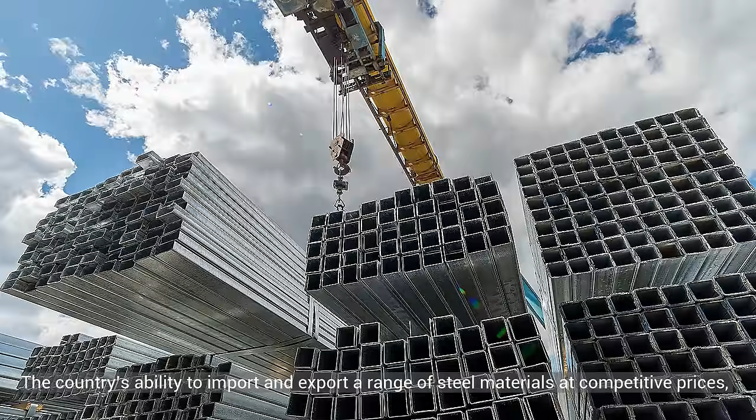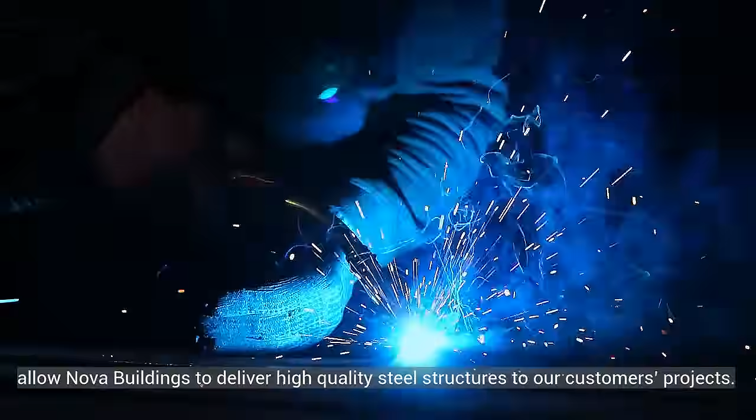Nova Buildings Regional Manufacturing Hub and Export Center for supply of pre-engineered buildings across Southeast Asia is located in Vietnam. The country's ability to import and export a range of steel materials at competitive prices, and the availability of skilled resources, allow Nova Buildings to deliver high-quality steel structures to our customers' projects.

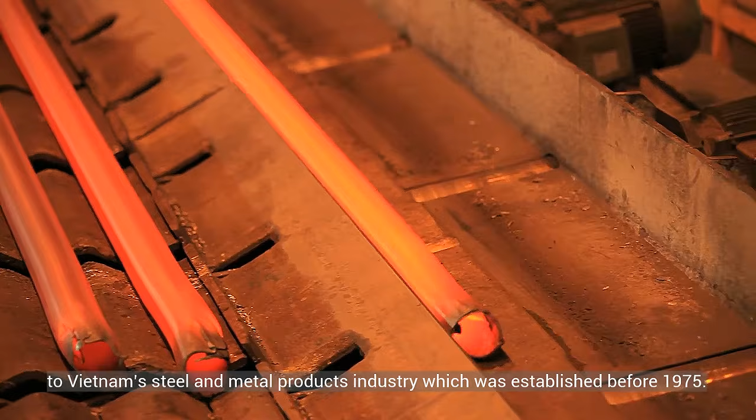Bien Hoa City on the left bank of the Dong Nai River is home to Vietnam's steel and metal products industry, which was established before 1975. Bien Hoa, the largest city in Dong Nai province about 30 kilometers east of Ho Chi Minh City, is in close proximity to the Dong Nai port in southeastern Vietnam.

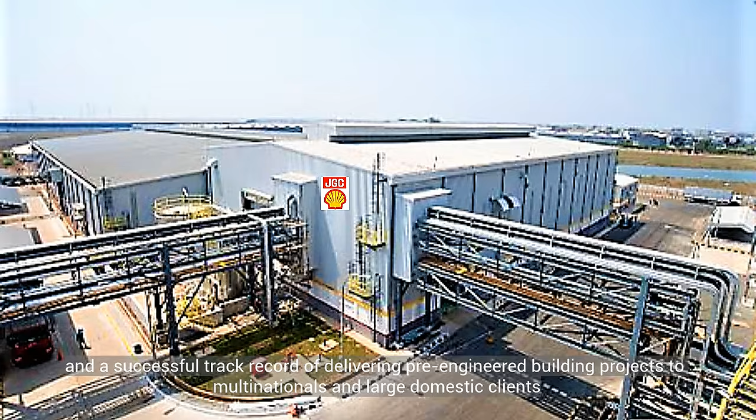This steel structure factory acquired by Nova Buildings has more than 10 years of operational history, and a successful track record of delivering pre-engineered building projects to multinationals and large domestic clients, in industries such as logistics and distribution, retail hypermarkets, agriculture, food and beverage, and aviation.

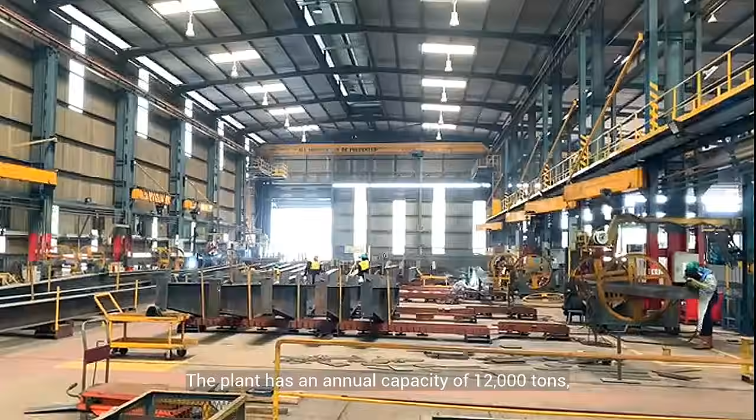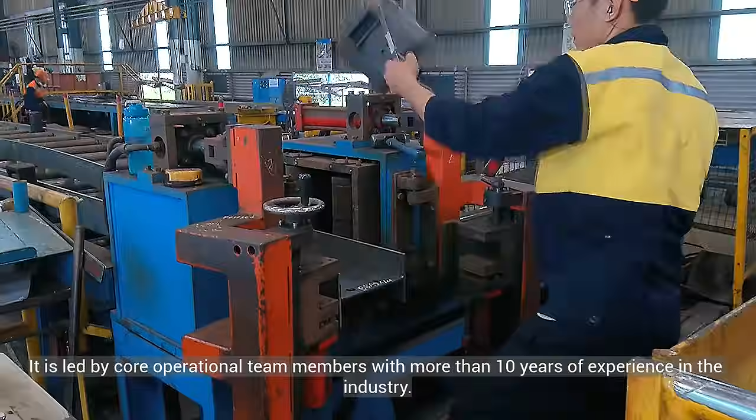The plant has an annual capacity of 12,000 tons, and a plan to ramp up production quickly with projected increases in demand based on Nova Buildings' sales pipeline. It is led by core operational team members with more than 10 years of experience in the industry. The production process is substantially automated, and supported by a factory layout that enhances the efficiency of production workflow.

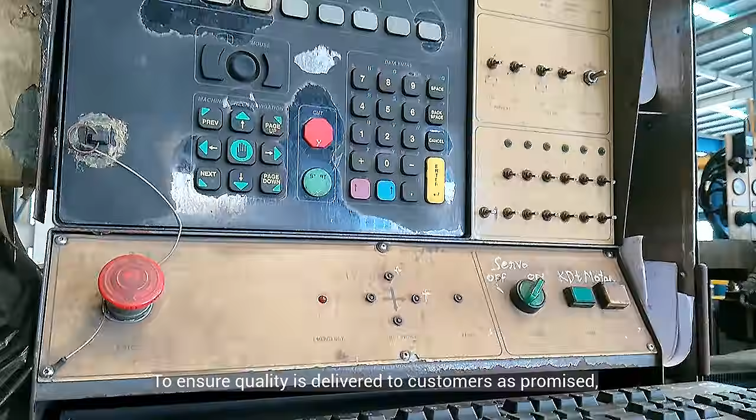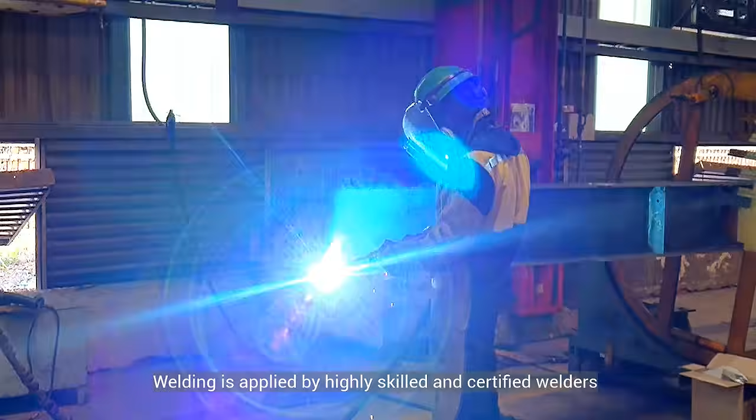To ensure quality is delivered to customers as promised, Nova Buildings facility is equipped with fine precision equipment that can achieve low tolerance values. Welding is applied by highly skilled and certified welders, in accordance with the Structural Welding Code of the American Welding Society. All production follows strictly to shop drawings approved by customers.

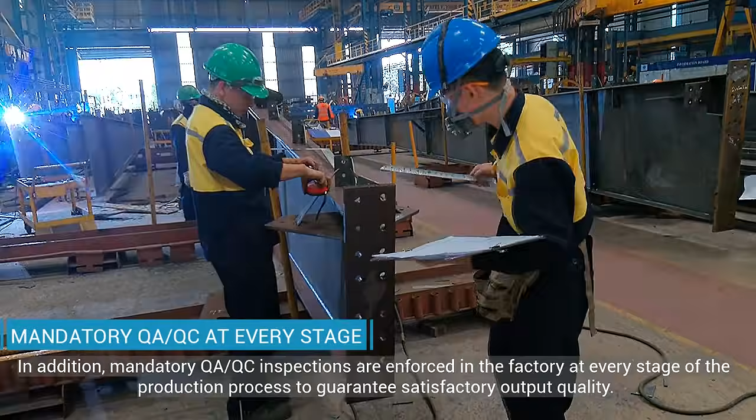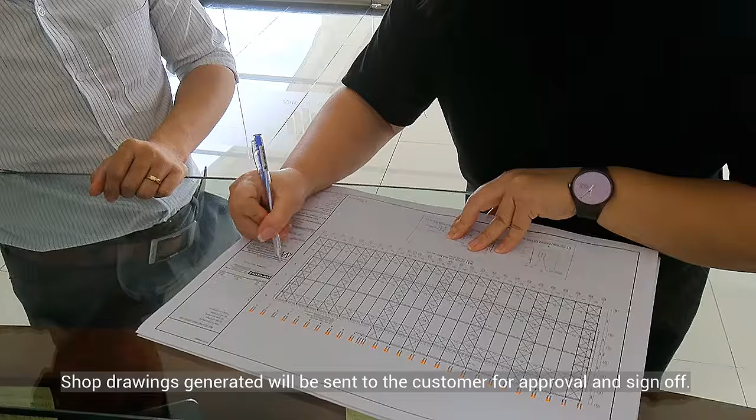In addition, mandatory QA/QC inspections are enforced in the factory at every stage of the production process, to guarantee satisfactory output quality. The detailing department is the first port of call for all project orders. Our experienced draftsmen at the factory will quickly generate shop floor drawings based on the project's engineering design and requirements. Shop drawings generated will be sent to the customer for approval and sign-off. Production begins when a batch of steel structures are scheduled.

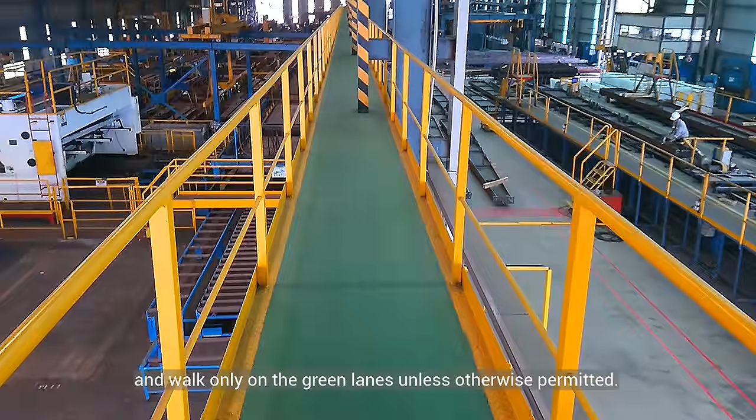Join us on an exciting journey in our steel structure factory. When visiting the factory, please ensure that you have put on the appropriate level of safety personal protection gear, and walk only on the green lanes unless otherwise permitted. In the factory, production is organized according to workflow stages. Each stage is allocated a station area, and manufacturing transits from one station to another along a U-shaped path designed to enhance workflow efficiency.

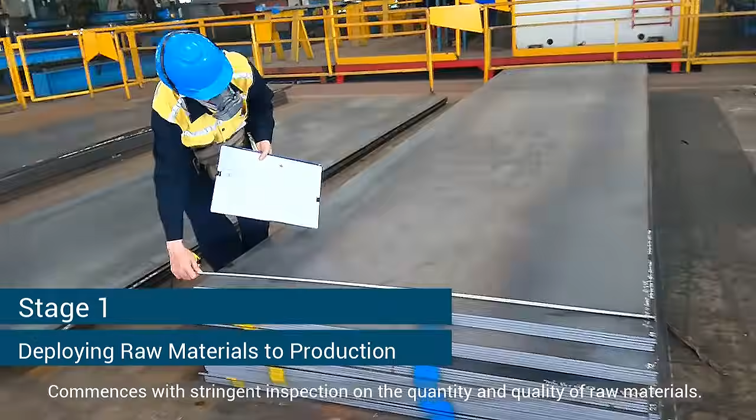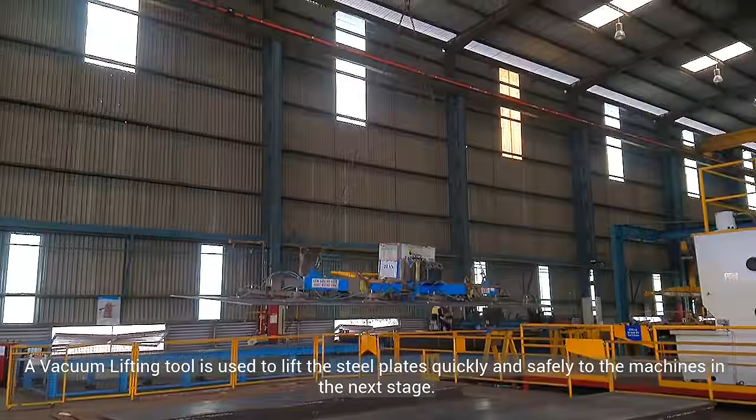The factory operations team commences with stringent inspection on the quantity and quality of raw materials. Drawdown of inventory is based on approved shop drawings. A vacuum lifting tool is used to lift the steel plates quickly and safely to the machines in the next stage. At this stage, high-grade steel plates for web and flange are cut to size and shape.

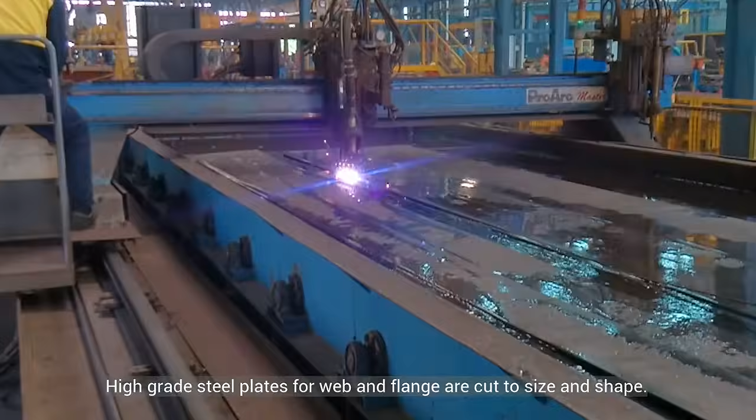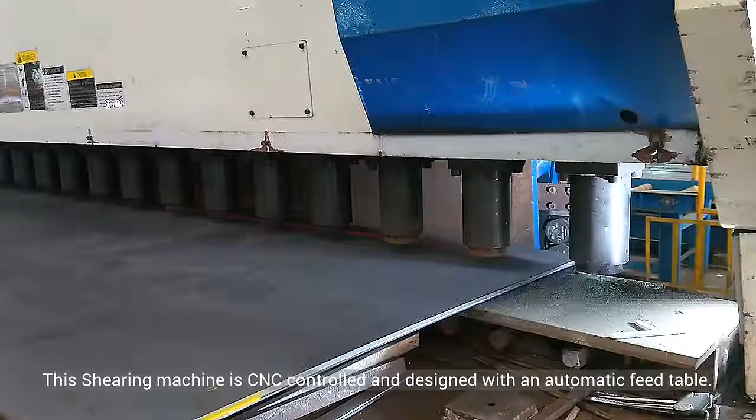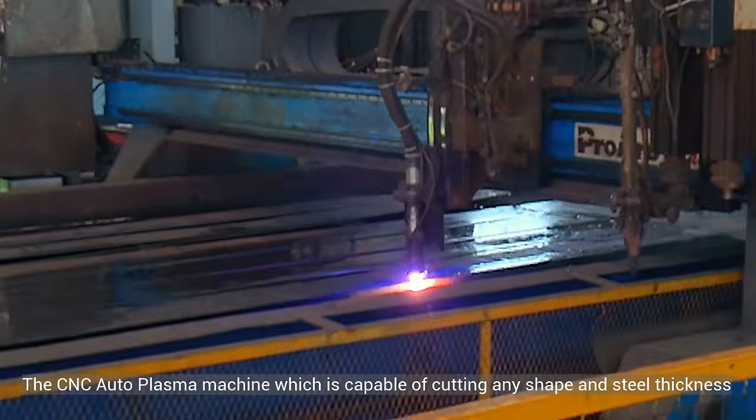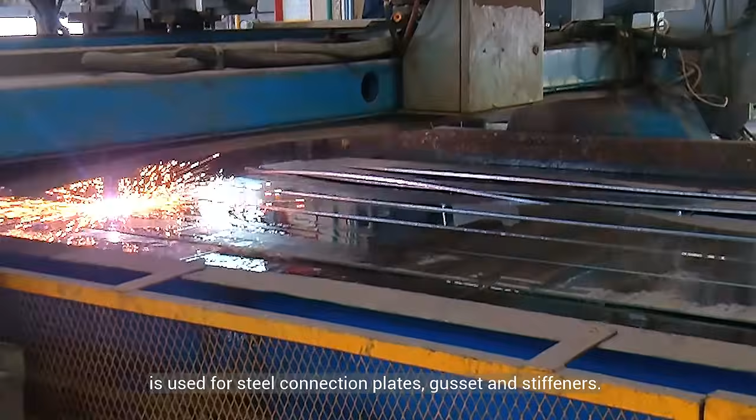Steel plates of thicknesses less than 16 mm are cut with a CNC hydraulic shearing machine. This shearing machine is CNC controlled and designed with an automatic feed table. On the other hand, the 10 torches flame planer machine is used for steel plates of thicknesses greater than 16 mm. The CNC auto-plasma machine, which is capable of cutting any shape and steel thickness, is used for steel connection plates, gusset, and stiffeners. A water pool used to absorb fumes discharged ensures a safe operation and production environment.

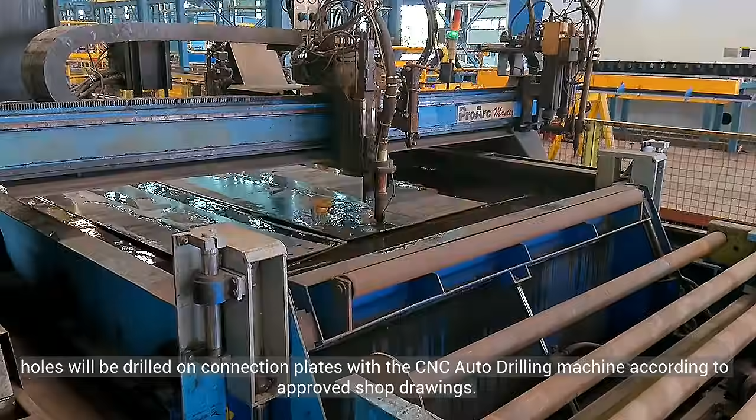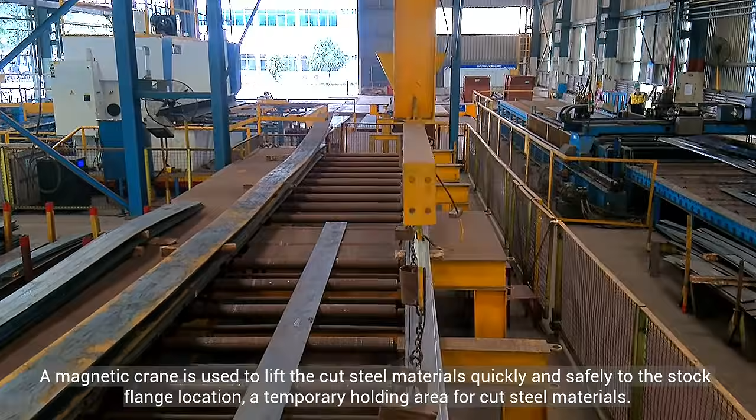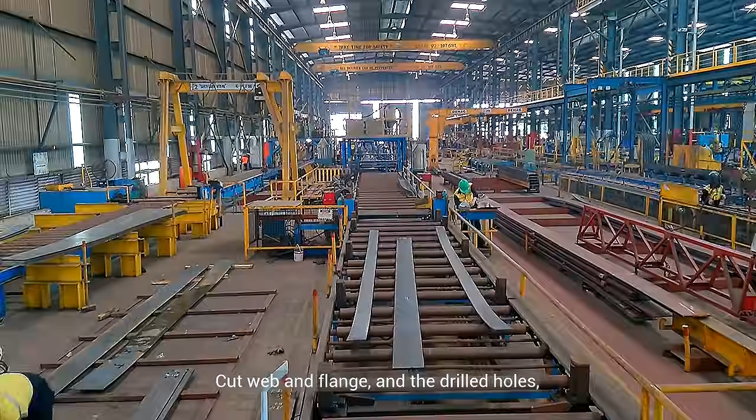After steel plates are cut to size, holes will be drilled on connection plates with the CNC auto drilling machine according to approved shop drawings. A magnetic crane is used to lift the cut steel materials quickly and safely to the stock flange location, a temporary holding area for cut steel materials. Inspection is carried out on every flange bar before assembly at the next stage. The cut web and flange, and the drilled holes, are checked to ensure all dimensions are accurate and within the allowable tolerance, in accordance with the approved shop drawings and standards.

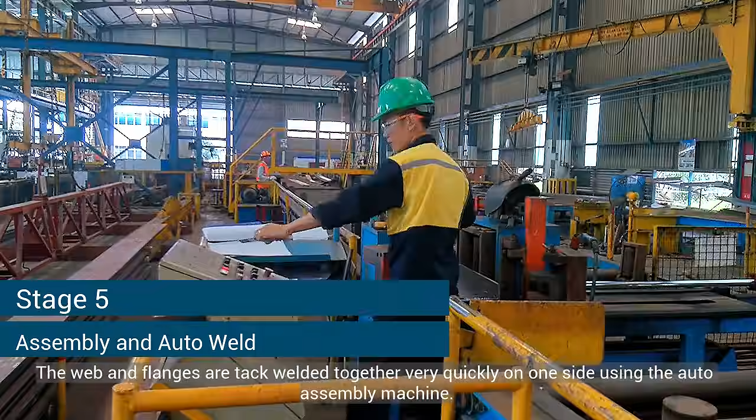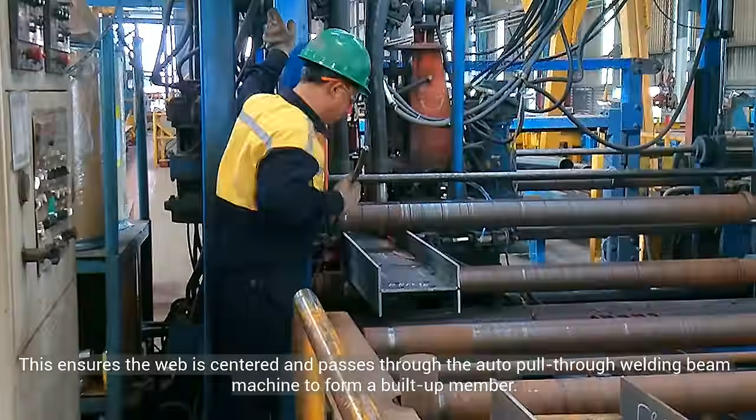The web and flanges are tack welded together very quickly on one side using the auto assembly machine. This ensures the web is centered and passes through the auto pull-through welding beam machine to form a built-up member. The entire assembly and auto weld process follows strictly to the shop drawings provided.

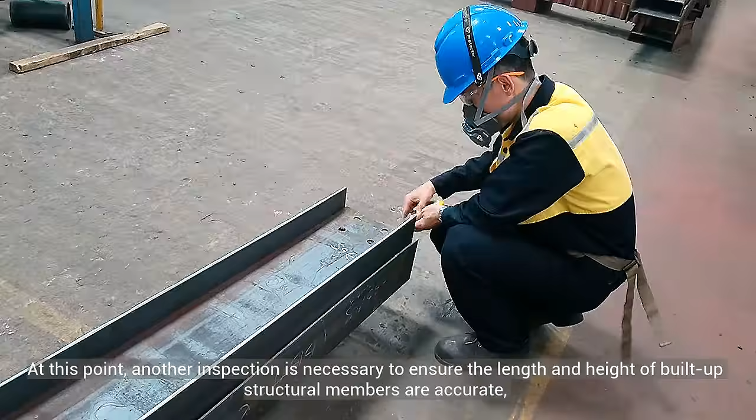At this point, another inspection is necessary to ensure the length and height of built-up structural members are accurate, before transferring to the fit-up station. The inspection will pinpoint any eccentricity between the web and flange.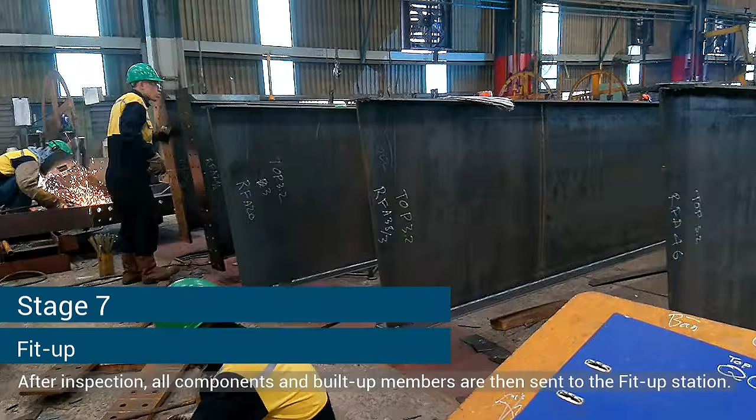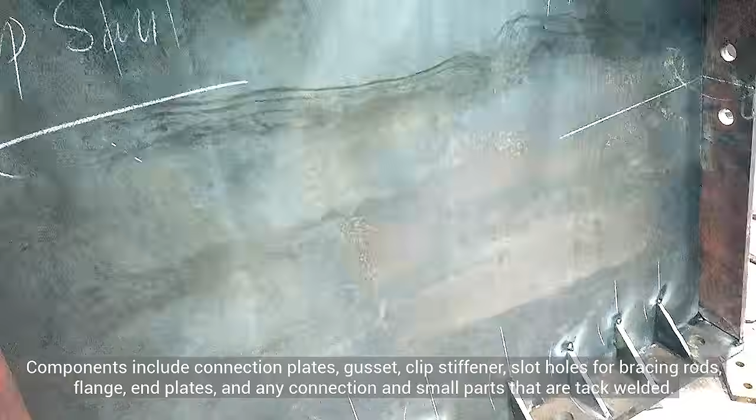After inspection, all components and built-up members are then sent to the fit-up station. Components include connection plates, gusset, clip stiffener, slot holes for bracing rods, flange, end plates, and any connection and small parts that are tack welded.

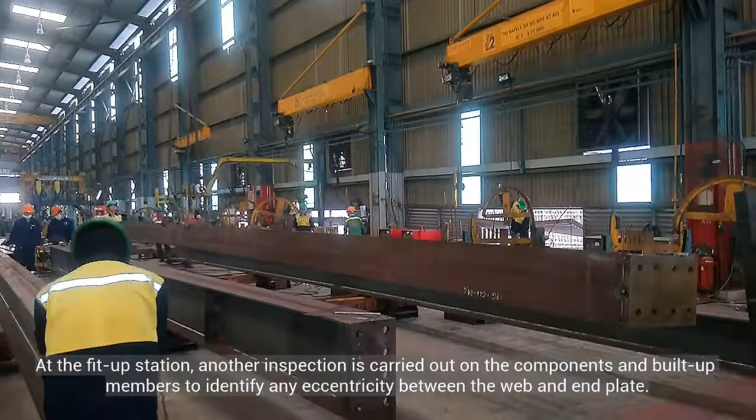At the fit-up station, another inspection is carried out on the components and built-up members to identify any eccentricity between the web and end plate. Inspection is completed before lifting to the hand welding station to perform permanent welding.

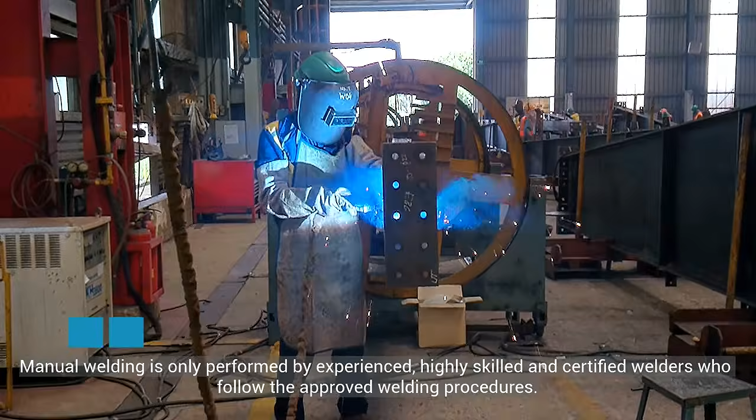In the Nova Building Steel Structure Factory, welding work follows the American Welding Society Manual D1.1. Our fabricated steel structures are in compliance with the AWS codes and MBMA standards. Manual welding is only performed by experienced, highly skilled and certified welders who follow the approved welding procedures.

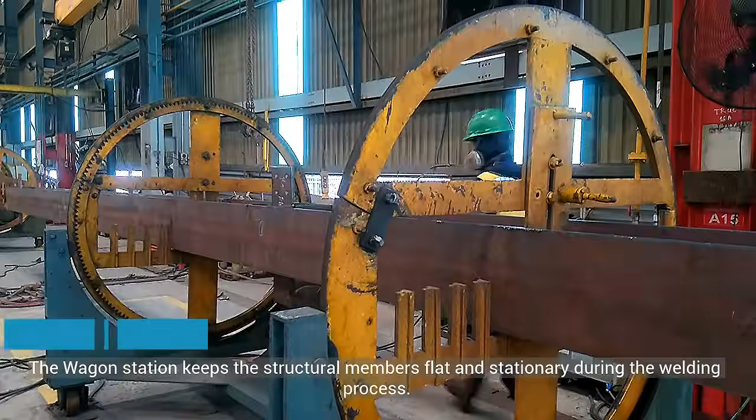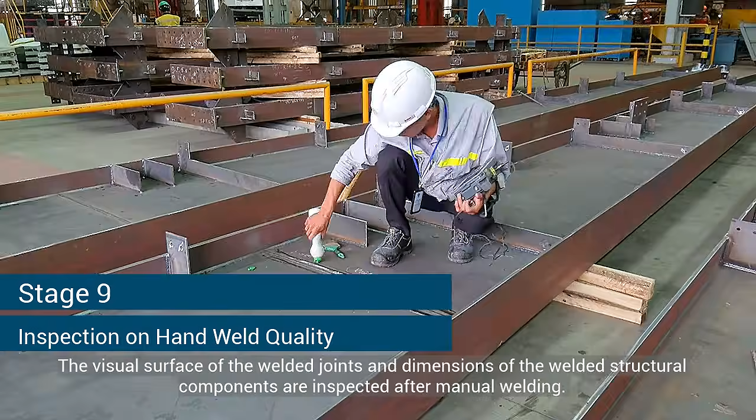The wagon station keeps the structural members flat and stationary during the welding process. This contributes to the quality of the finished product, and ensures hand welding work is performed exquisitely. The visual surface of the welded joints and dimensions of the welded structural components are inspected after manual welding.

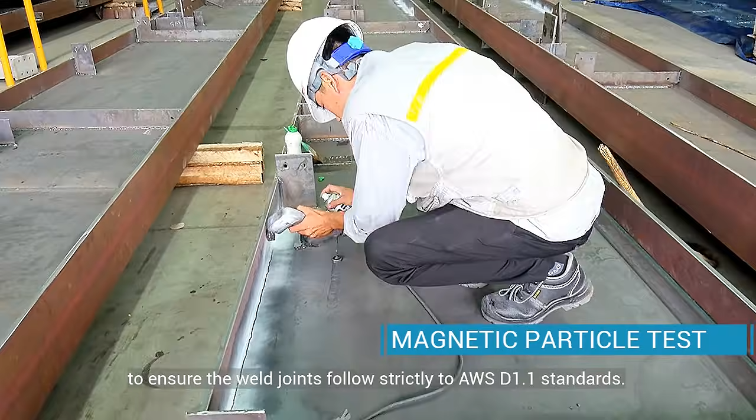Third-party non-destructive testing inspectors are engaged to conduct ultrasonic test and magnetic particle test on the butt joints to ensure the weld joints follow strictly to AWS D1.1 standards.

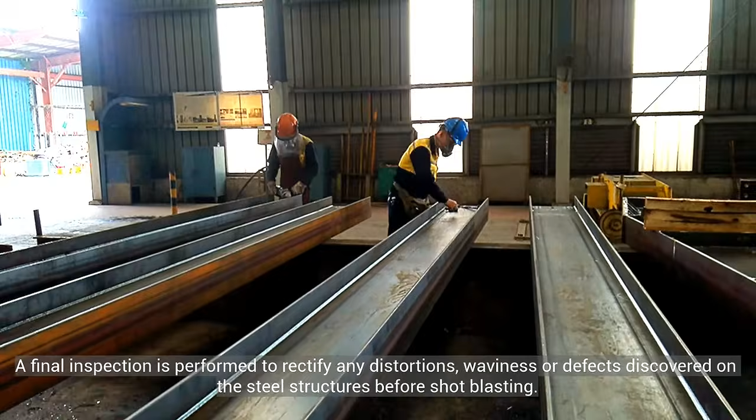Now, a final inspection is performed to rectify any distortions, waviness, or defects discovered on the steel structures before shot blasting. The surfaces and drilled holes also need to be thoroughly cleaned. Welding spatters, grease and stains are removed, and any sharp edges will be ground to achieve a smooth surface. The clean steel structures are now channeled to the auto shot blasting chamber.

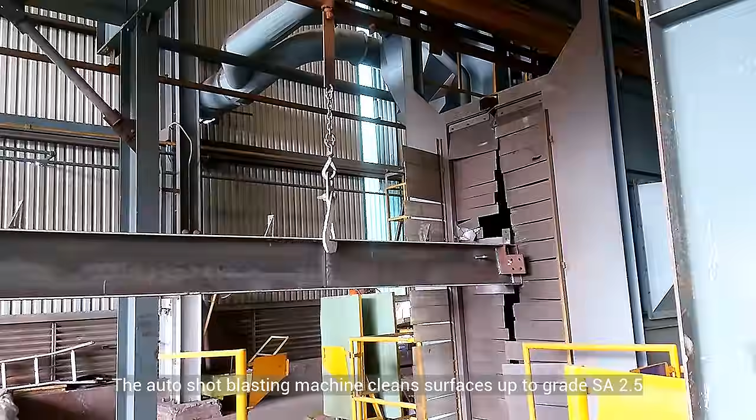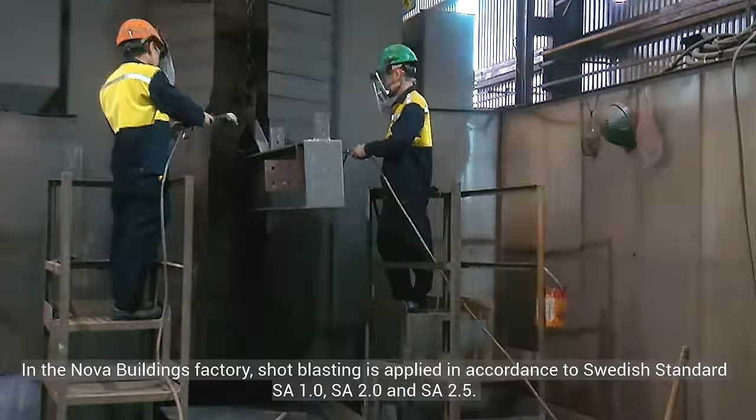The auto shot blasting machine cleans surfaces up to grade SA 2.5, and adheres to ISO 8501-1 standards. In the Nova Buildings factory, shot blasting is applied in accordance to Swedish standard SA 1.0, SA 2.0, and SA 2.5. The surfaces are then checked by comparing with the international standard.

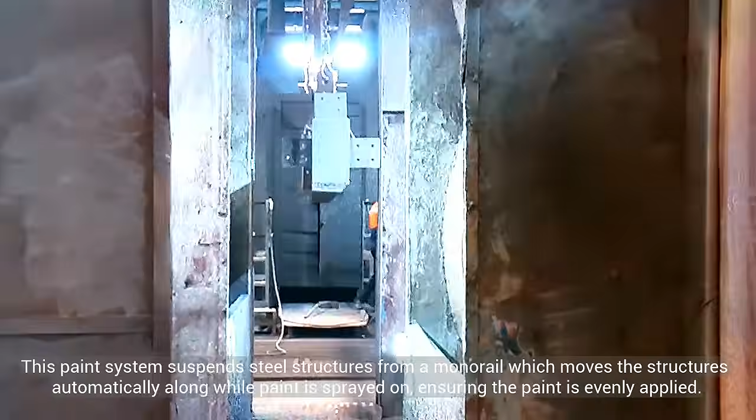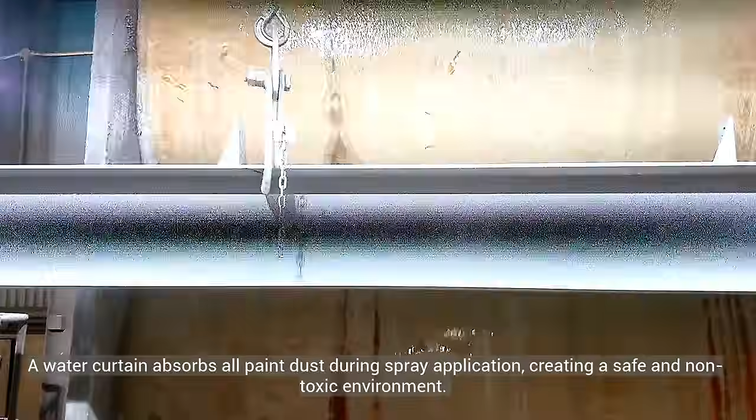After shot blasting, the steel structures are moved to the paint station where paint is applied using an advanced application system. This paint system suspends steel structures from a monorail which moves the structures automatically along while paint is sprayed on, ensuring the paint is evenly applied. A water curtain absorbs all paint dust during spray application, creating a safe and non-toxic environment.

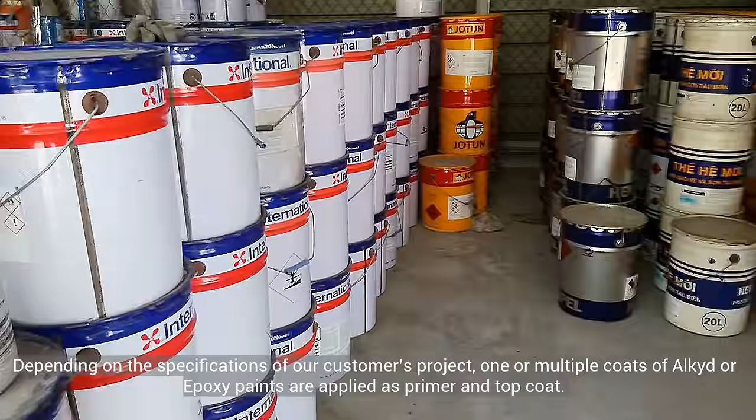Depending on the specifications of our customer's project, one or multiple coats of alkyd or epoxy paints are applied as primer and top coat. The thickness of the paint layers is checked while the paint is wet, and after the paint has dried. Finally, the steel structures are ready.

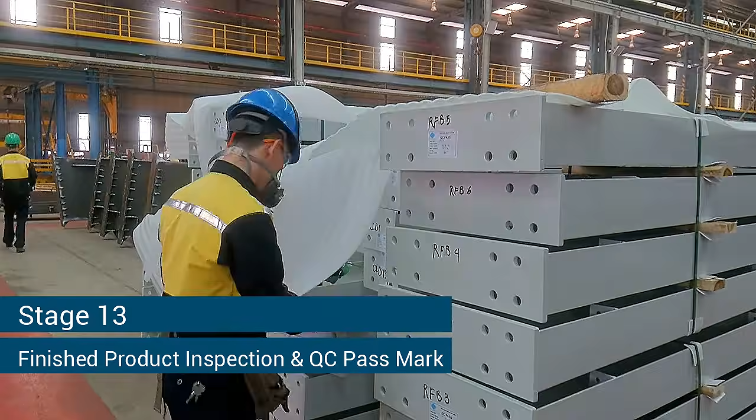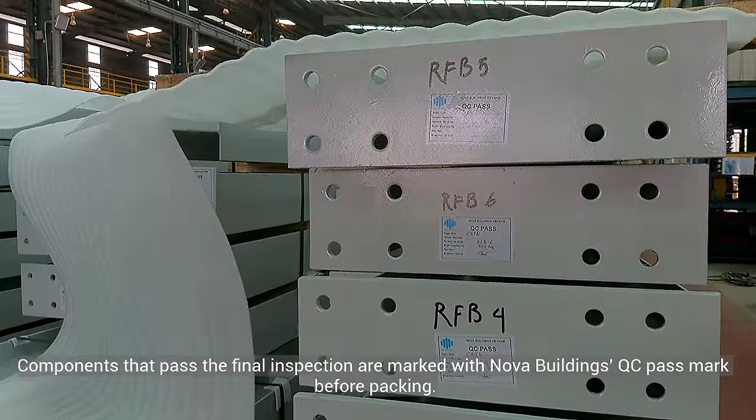Every component is checked 100% for surface quality and scratches. The quality inspector will perform a final round of checks on the dimensions and paint thickness. Components that pass the final inspection are marked with Nova Buildings QC Pass mark before packing.

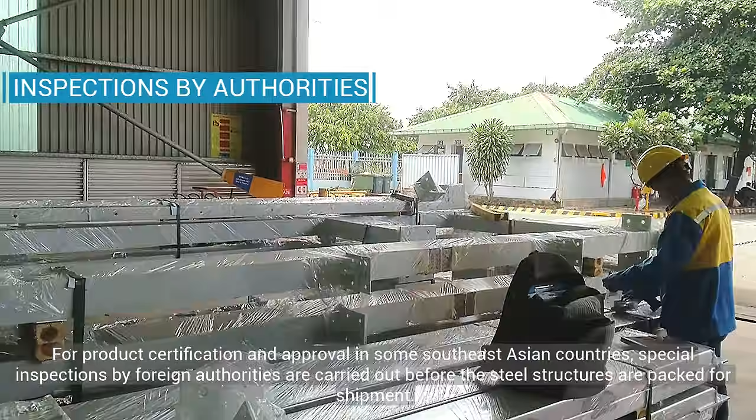For product certification and approval in some Southeast Asian countries, special inspections by foreign authorities are carried out before the steel structures are packed for shipment. The ready steel structures are packed and stacked onto the loading platforms for loading to container and shipment to site.

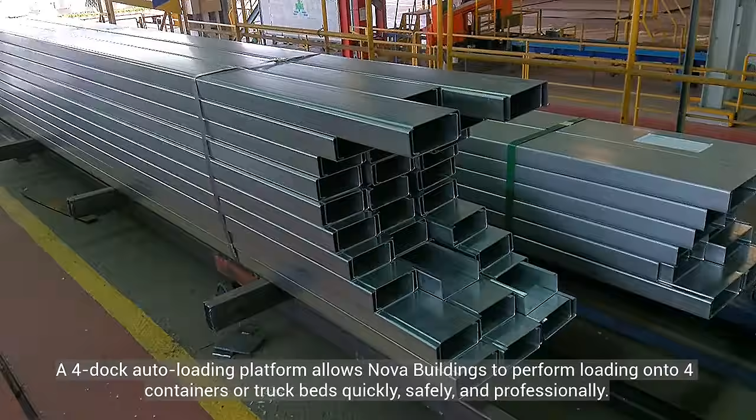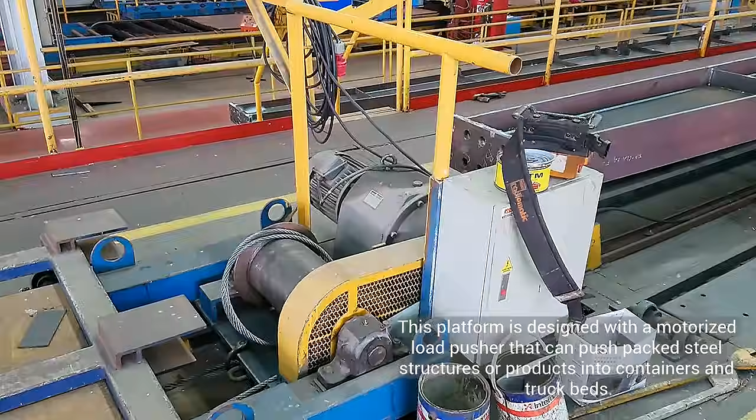A 4-dock auto-loading platform allows Nova Buildings to perform loading onto 4 containers or truck beds quickly, safely, and professionally. This platform is designed with a motorized load pusher that can push packed steel structures or products into containers and truck beds.

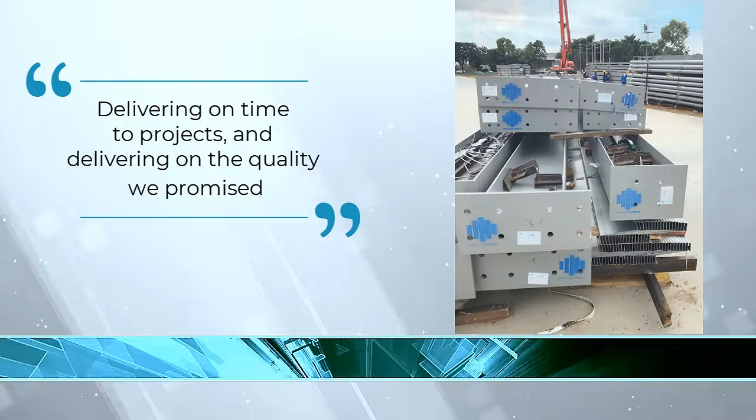Our vision is to deliver the Nova difference that can create a positive impact on our customers. Delivering on time to projects, and delivering on the quality we promised, are both integral to upholding Nova Building's vision.